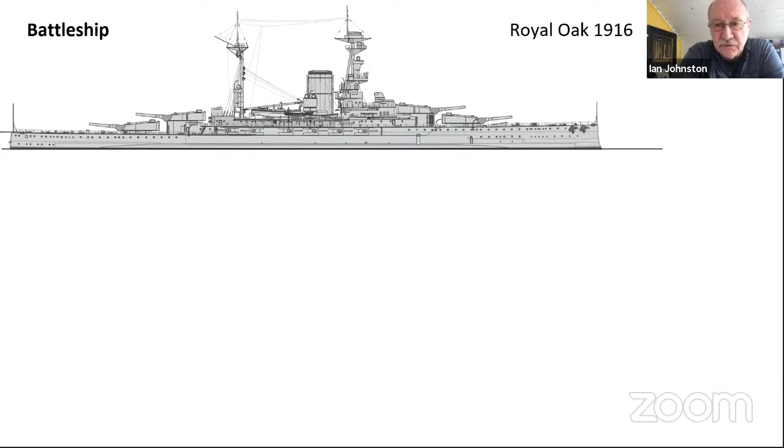If we look at the battleship - here is Royal Oak, very familiar to people from Orkney, a state-of-the-art battleship in 1916 - and compare that to a battlecruiser, you can see in scale just how much bigger the battlecruiser was. The reason for this is the whole issue of speed, and the amount of steam required to drive the turbines to make this extra speed.

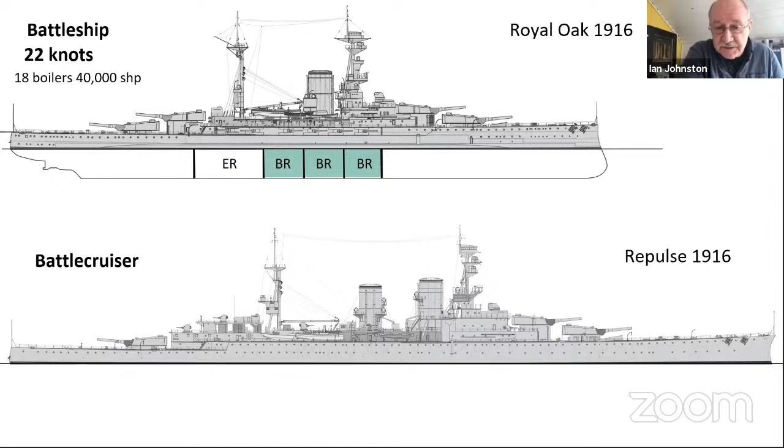If we look at the internal makeup of the Royal Oak, we can see the number of boiler rooms and the engine room, and compare that to Repulse, you can see the huge additional space required in the hull for the extra boilers and larger engines needed to drive this ship at an additional 10 knots. That explains the fundamental reason why the battlecruiser was such a larger ship, much more impressive in many ways, and very quickly warmed themselves to the hearts of the British public.

The one downside was that while the battleship was very heavily armored, the battlecruiser was lightly armored, and it was seen that speed was really part of its defense - getting out of the way quickly.

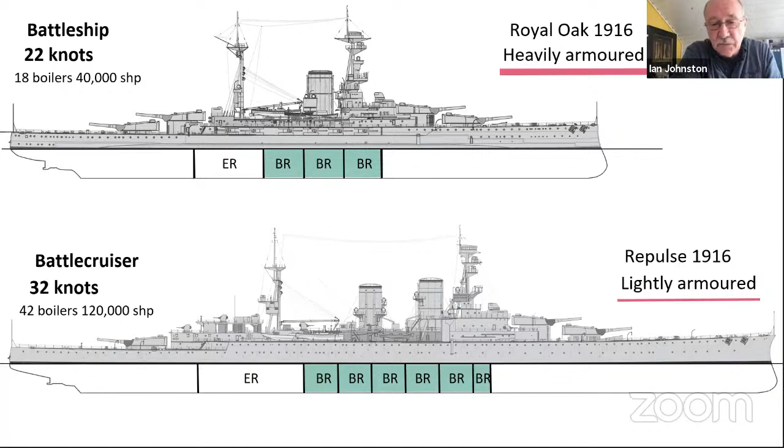Over the 10 years from the design of the first battlecruiser in 1906 to the appearance of Hood, the type evolved very quickly indeed, almost doubling in displacement tonnage, and going from a rather ungainly looking ship to the very handsome, beautiful lines of HMS Hood and Repulse.

So a little bit more now about the Anglo-German naval race, of which Hood was probably the last British warship built as part of that race. This was all because of the rise of Germany as a naval power. Germany was united as a country in 1871, but it wasn't until Kaiser Wilhelm II came to power in 1888 - he was, of course, the grandson of Queen Victoria - that things changed. He was hugely impressed by the British fleet, and decided that Germany, hitherto a large land power but not a naval power, should have a very large navy, one which could perhaps not rival the British fleet, but take it on and do it some damage.

Through Admiral von Tirpitz, head of his Admiralty, Kaiser Wilhelm formulated a series of laws which enabled the German Navy to become very much larger in size. Particularly from 1906 onwards, when the British battleship Dreadnought appeared, the Anglo-German naval race began in earnest.

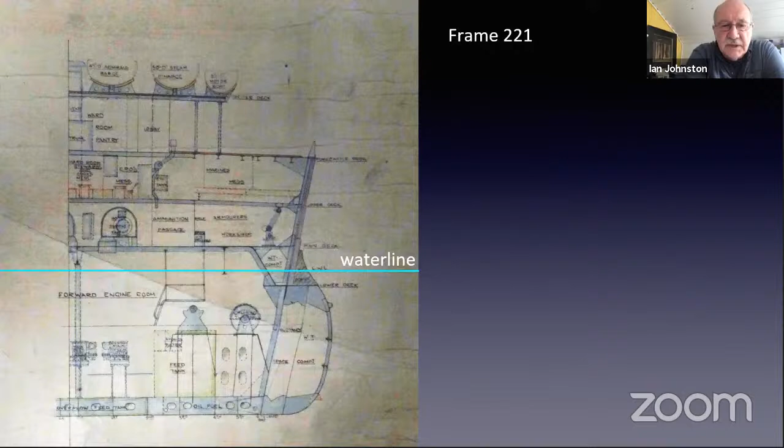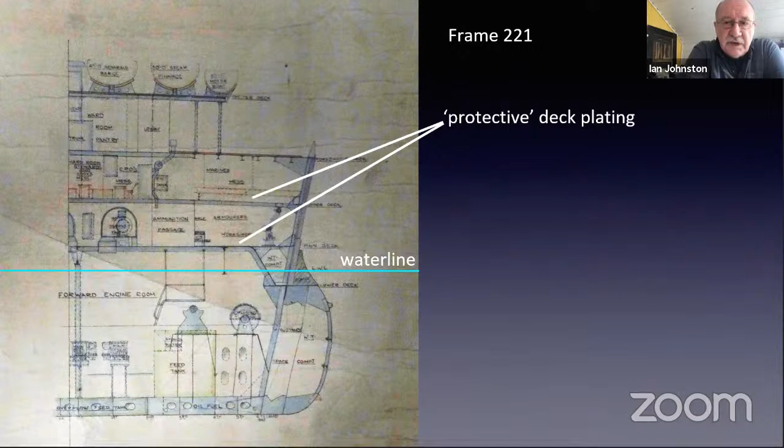So the changes that were made to HMS Hood as the keel plates lay on the slipway at Clydebank, as a consequence of Jutland, were as follows. Here is a section through the ship, through the midships section, showing where the changes would take place. HMS Hood had what was termed protective deck plating on a number of decks.

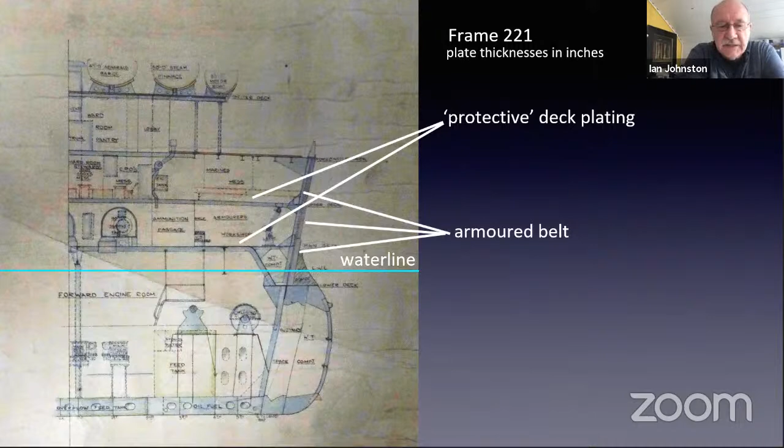She had side armor, an armor belt in 3 different tiers. And she had this rather large bulge which extended for almost all of the hull. That was there not to deflect, but to absorb the explosive force of a torpedo, should she be hit by one.

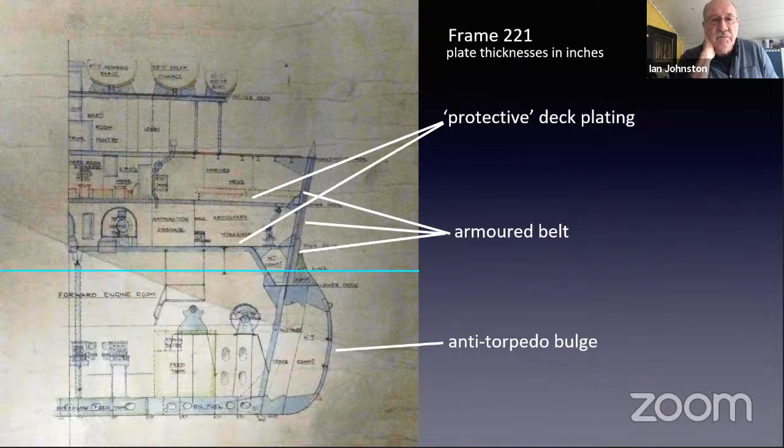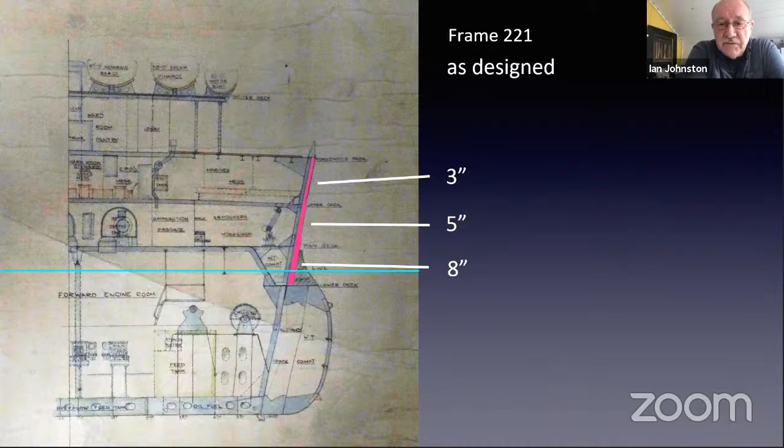Above decks, the turrets were armored, as were the barbettes which supported the turrets. So what happened as a consequence of the design changes was that the 3 tiers of armor running down the side of the ship were changed from 3, 5, and 8 inches to 5, 7, and 12.

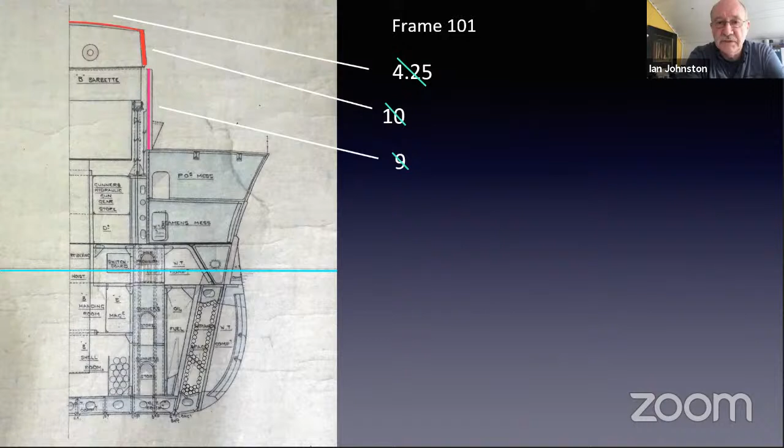The above decks armor on the barbette and on the turrets themselves was increased to 5, 12, and 12 inches, and 15 at the front of the turrets.

And she would now be 3 feet deeper in the water, which gave rise to problems right aft, as she was always a wet ship because of this. But importantly, she was now armored on the same scale as a battleship. Going back to Royal Oak, for example, she was armored on the same scale as that ship, giving rise to HMS Hood being probably what was termed the first fast battleship.

The photographs are quite exceptional, and out of the chaos of deindustrialization, when lots of photographs and records of famous companies were lost, we are very fortunate that those of John Brown and Company have survived. Currently, most of these records are held by Glasgow University and also by the National Records of Scotland in Edinburgh. So the photographs you're about to see are from that collection. They are mostly 10 by 12 and 12 by 15 glass plate negatives, and the quality is absolutely stunning, as I hope you get to see from the photographs that follow.

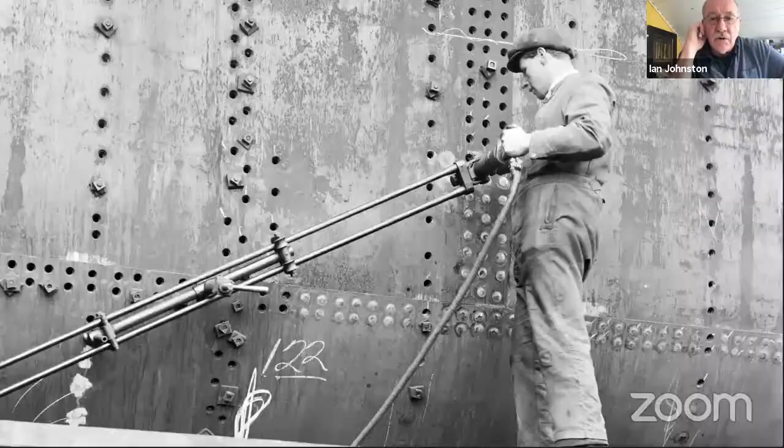Or they used a pneumatic riveting tool, such as this young man here is using at Clydebank. The pneumatic riveting tool was a very recent invention and meant that just one riveter was required to close the rivet. These riveting hand tools were very heavy, thus this structure to try and take some of the weight off, to prevent the riveter having some sort of fatigue after a short while.

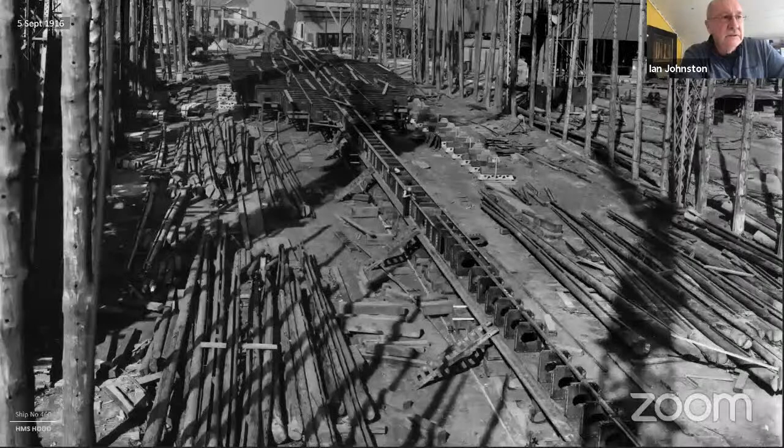This is the first ever photograph of HMS Hood, taken on the 5th of September, just 5 days after the keel was laid. There is no photograph of the keel laying, and it shows quite significant progress in the ship just in these 5 days.

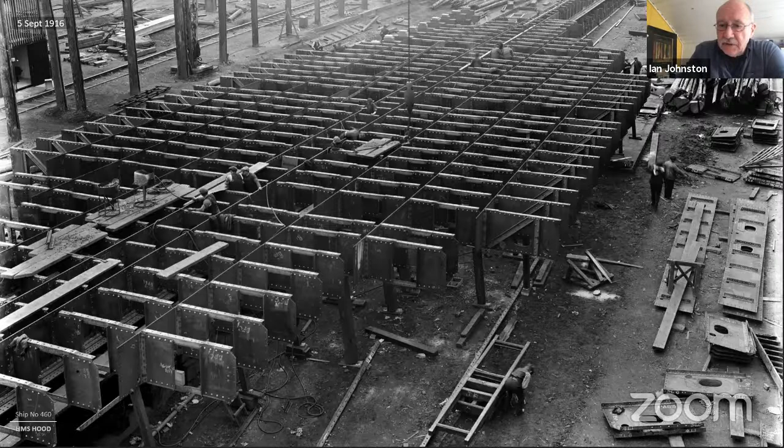This photograph, taken the same day, shows the midship section of the double bottom, and it shows how progress had been made. Partly this was because, if you look over to the right, you can see there are some sections already riveted with angle iron, which would be done in the plater's shed and then brought down. So a lot of pre-assembly had been done in the shops before it was actually laid down. The other thing to say is that this structure hasn't actually been riveted, it's been bolted together. Once it's been bolted together and faired and made true, that's when the riveters come in.

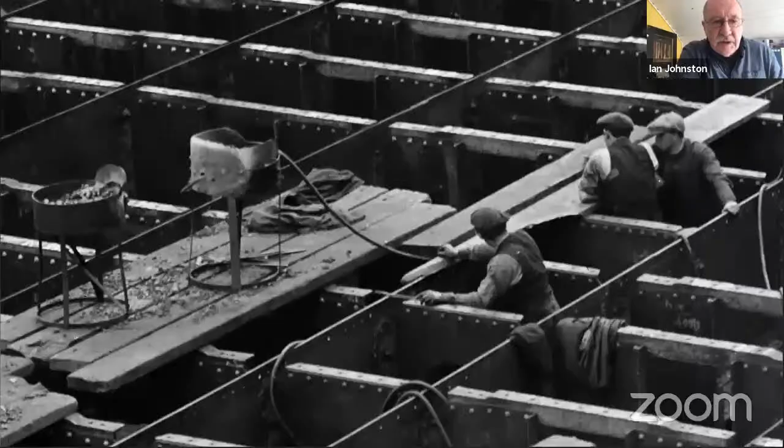This is a detail of that photograph and shows a couple of rivet fires. The rivet fires you see here on the planks were where the rivets were heated and then thrown to whichever riveter required them, and thus the riveting would begin. At this time, only 197 men were employed on Hood, just 3.7% of the workforce.

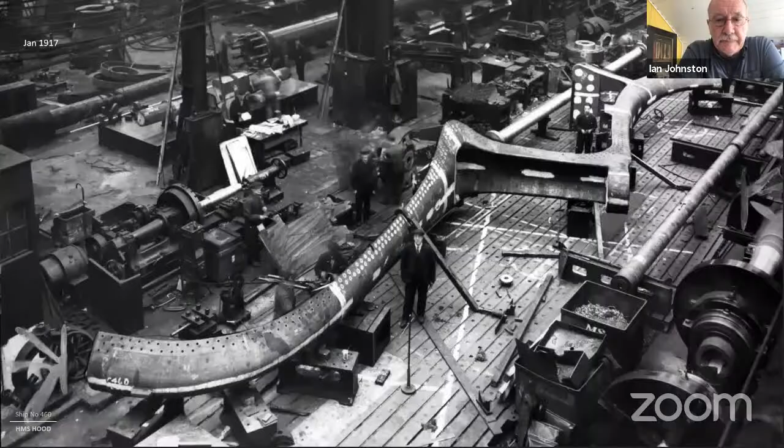While work was in progress at Clydebank, quite a lot of material had to be ordered from outside the yard. All the armor, the main armament, and the armament systems would all come from elsewhere. The main armament would come from Barrow-in-Furness, but a lot of the castings would come from William Beardmore and Company in Glasgow. This is a part of the stern frame seen here at the Parkhead Forge in Glasgow, bearing the ship's number, painted at the far end there, ship number 460.

The rivet holes have been cast into the job, as it were. And the next time we see this is down at Clydebank.

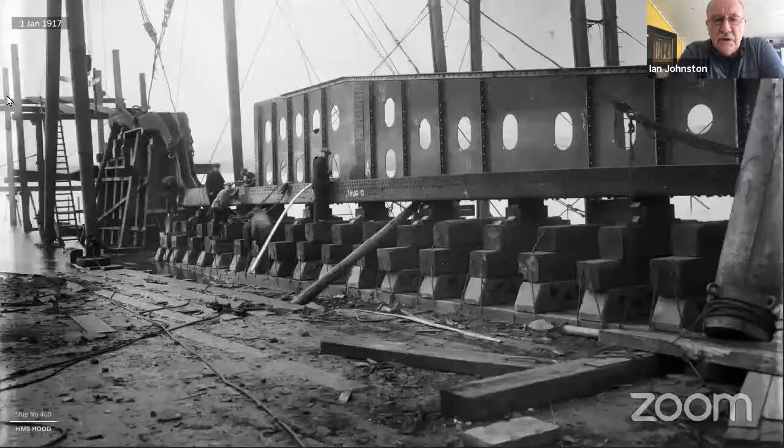This is the stern section of HMS Hood, and you can see that stern casting there, which John has just highlighted, being pulled into position with the keel and the vertical keel sections of Hood. A detail of this photograph shows work progressing, using a block and tackle and a turnbuckle to pull this casting, which probably weighed something like 25 or 30 tons, into position.

It will then be faired by the shipwrights to make sure everything is true, and once that's done, it will be riveted into the structure of the ship.

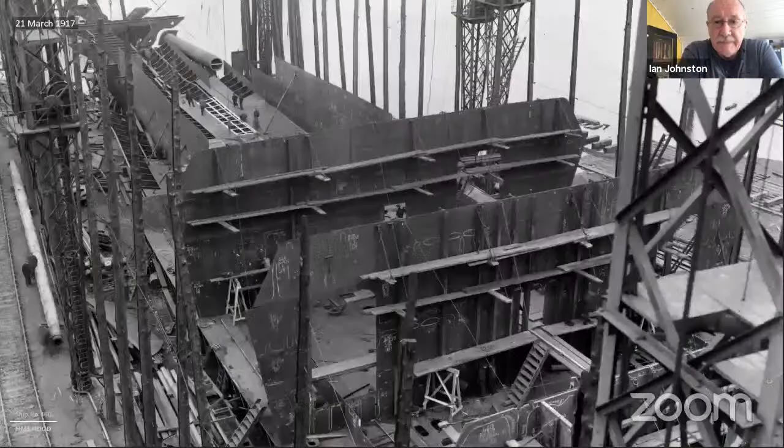This photograph from March 1917, looking right aft, shows some of the bulkheads that would separate the engine rooms. If you look at the stern tube right aft there, that's one of them. HMS Hood had 4 shafts, so this is just one shaft, the tube through which the propeller shaft will run.

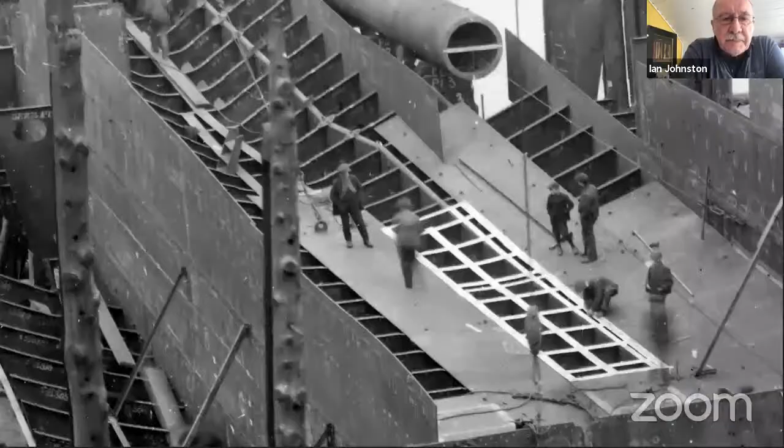Notice this white grid structure sitting there, made up of light wooden strips by loftsmen. This template will be taken back up to the plater's shed, where a plate will be made to fit that shape exactly. This is the template for making that plate, which has a compound shape, a curved plate. That's partly how complex plates were made, templates were taken for each individual one and then taken up to the shops to be made.

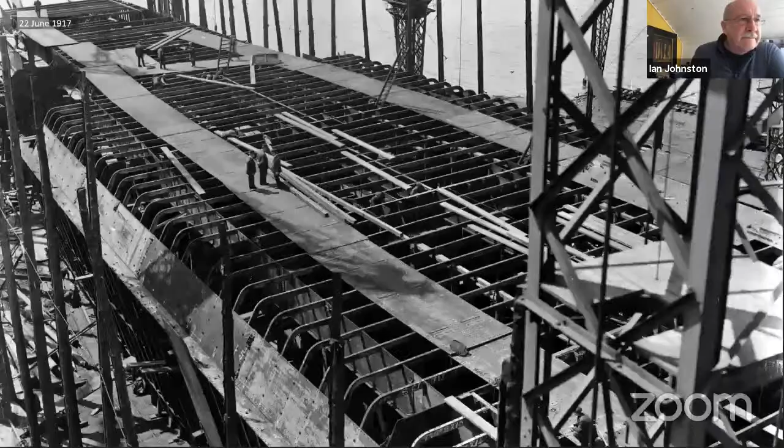This photograph shows the increasing size of the ship on the stocks, and you get some sense of just how big this ship is going to be. We're at main deck level here. The 3 gentlemen are standing on the main deck, so there's still a significant number of decks to come above that. We're probably only about halfway up the hull.

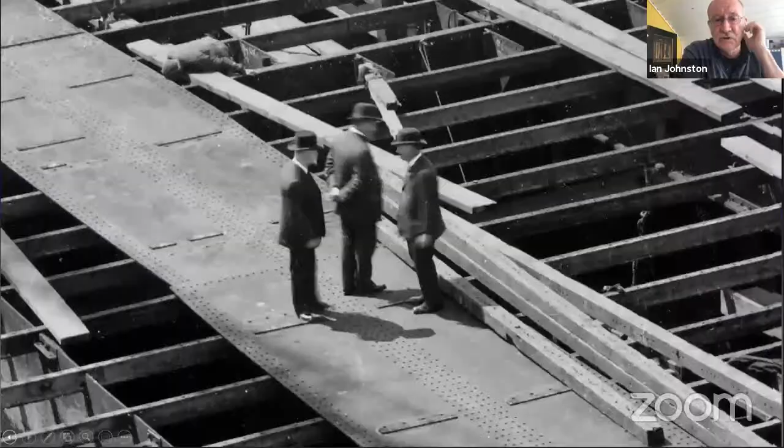In the next image, a detail of these men, headgear was a very important way of deciding who was who in shipyards. The cloth bonnet, of course, was the workman. Then you had the trilbies, the Homburgs, the top hats, and so on, identifying different people. These men are quite clearly managers of some sort, probably the shipyard manager, maybe some other directors, and they made regular trips onto the ship to see what progress was being made and to report back to the Admiralty.

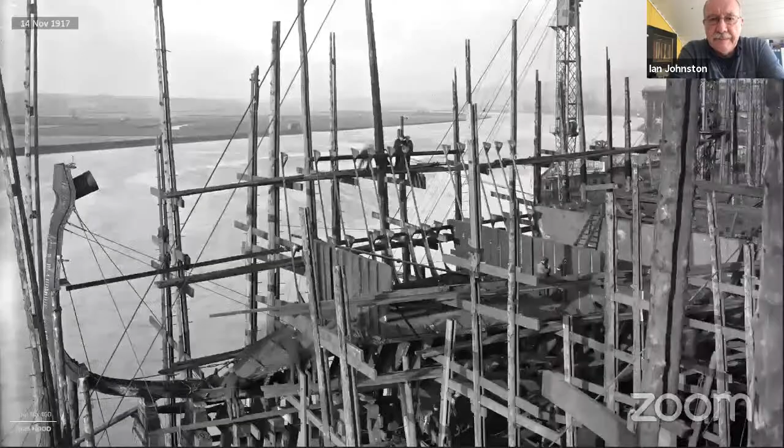This again shows the stern frame in situ, but it also shows the huge amount of timber used in shipbuilding in those days in the form of staging and props and so on.

Looking at the men standing up there, we see just how precarious work on this ship was, and indeed in all ships and shipbuilding at this time. Very little attention was paid to safety. These men do have a plank to hold on to, but they're only standing on a very narrow ledge. You can also see two other figures here who are very blurry, because all these photographs are time exposures.

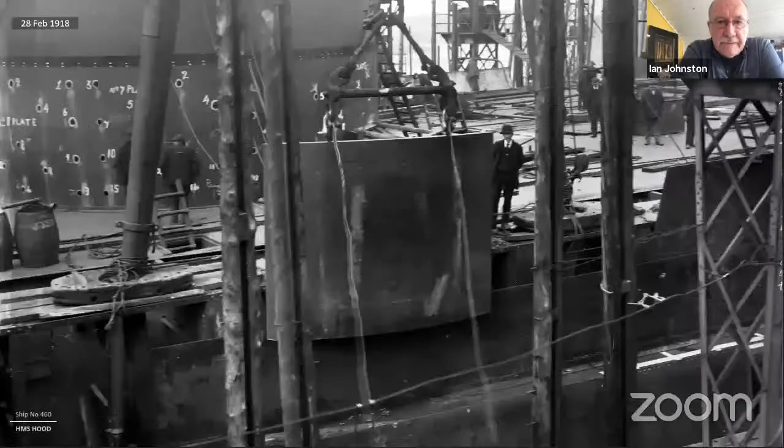This photograph shows a heavy armored plate being lifted by a series of A-frames or sheer legs, which have been stepped onto the deck of the ship to hoist this very heavy plate up, perhaps weighing between 30 and 40 tons. It's going to be fitted to the structure behind it, which you can see with all the holes and the numbers. Armor was bolted to the substructure of the ship, and these holes, which you can see top left there, are the holes through which the bolts will pass to secure the armor to the structure of the ship.

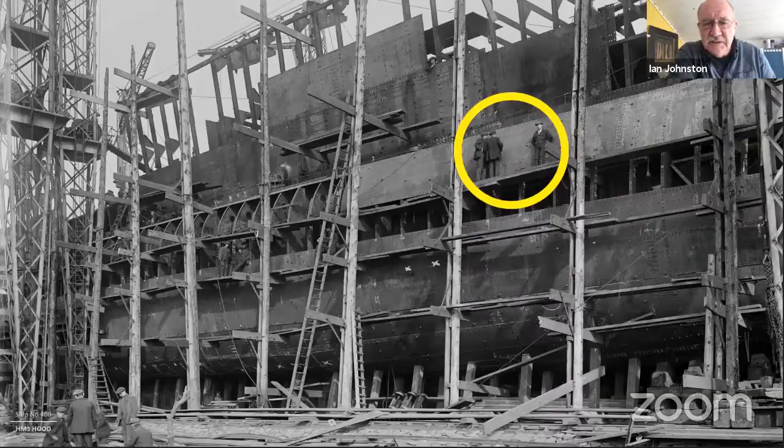A view of the side of the ship, the port side of the ship, showing the bulge, which I identified earlier, being constructed. In the next slide, the three workers standing on this very narrow ledge point to the very precarious nature of shipbuilding. What you can't hear here, of course, is the sheer noise that would be in the shipyard at this time, with innumerable riveting guns going and hammering and so on. So you don't get the sense of the atmosphere of it, but you do see the precarious nature of working on ships like this. These men are probably standing 30 feet up off the ground at this point.

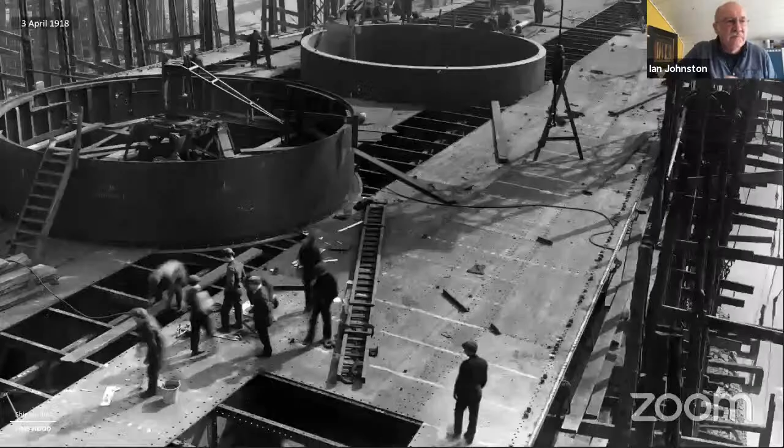This image is looking at the after end of the ship, and here are the barbettes. The barbettes are the circular, heavily armored structures upon which the turrets will sit. The one right aft has already had its armor fitted, which is 12 inches thick, whereas the one nearest the camera is still waiting to have its armor fitted.

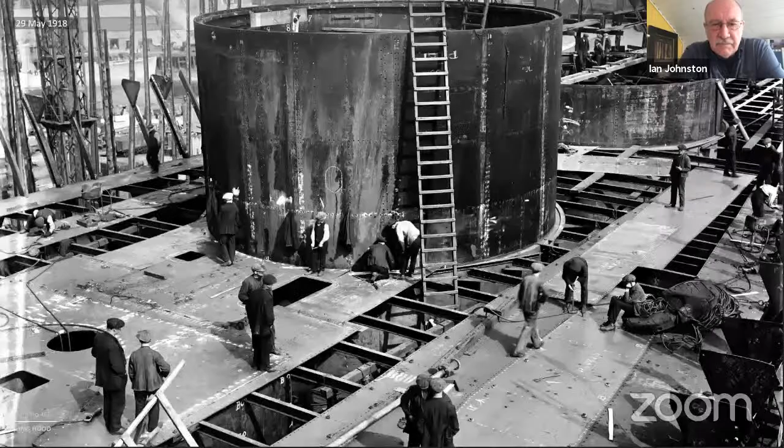Just a close-up of B barbette and work in progress there, giving some idea of the general conditions men were working in. Over to the left-hand side you can see the frames with knee joints at the top of them - that is the weather deck, which will be the final height of the decks on the hull of the ship.

Center bottom of shot, these two gentlemen - I had an uncle who was a plater, and I would show him photographs like this and ask, what in heck's name are these two men doing? He would say they're simply trying to make themselves heard because it's just so damn noisy.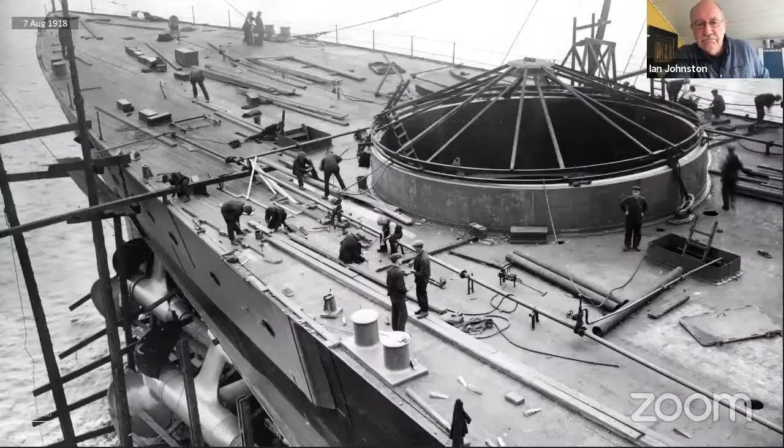Looking right aft, she's still on the stocks here. The shafts are in position, the propellers have been fitted, and the deck is being planked - this is the quarter deck. The decks were all the finest teak, typically 2.5 to 3 inches thick, and these craftsmen are making the most wonderful job of fitting them together. You can recognize some of the tools - brace and bit, various hammers and planes. The elevated pipes running across carry compressed air for power tools.

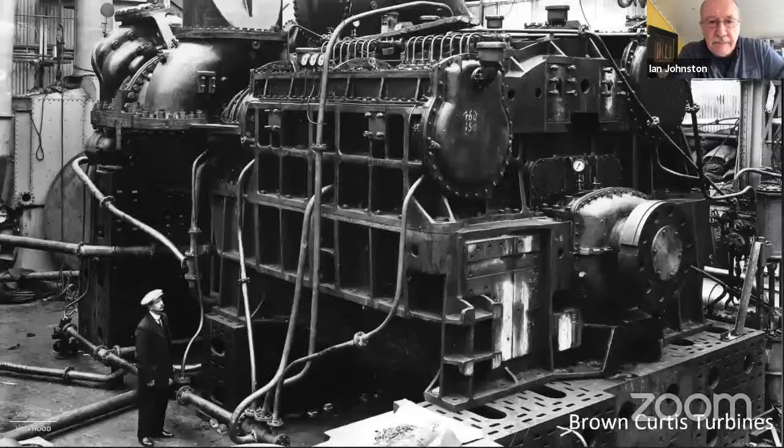The machinery which will drive the ship - a series of turbines inside this major structure, a Brown Curtis turbine. Curtis turbines were American designs, but the John Brown Company modified them to make them suitable for Royal Navy purposes, hence Brown Curtis turbines, though essentially of American design. There would be 4 of these, one for each shaft. This one has been completely assembled, wired and plumbed so they could run it gently in the shops to iron out issues before it goes on the ship. It will then be broken down into component parts, taken to the quayside, and lowered into the ship. Craneage at Clydebank didn't go any greater than 150 tons, so while they could lift 150 tons, they couldn't lift the 300, 400, or 500 tons which this would weigh.

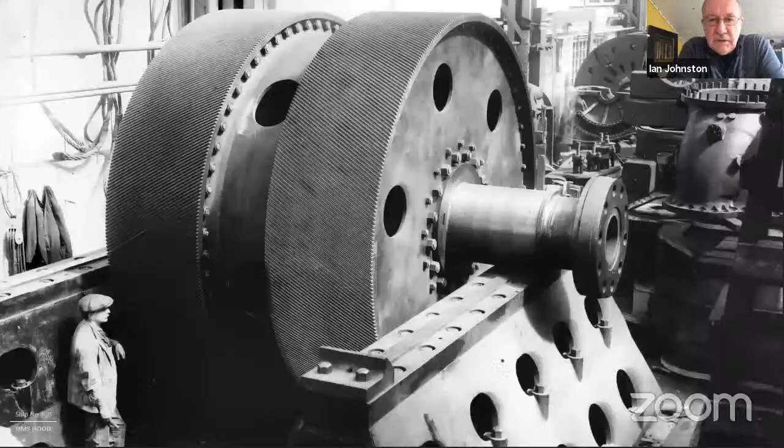This photograph shows a helical gear wheel. Once again there would be 4 of these, one for each shaft, on a trestle here being balanced to make sure it's perfectly in balance, so when it goes into the ship it will run perfectly. This is a casting which has been machined, and it would weigh something in the region of maybe 40 tons.

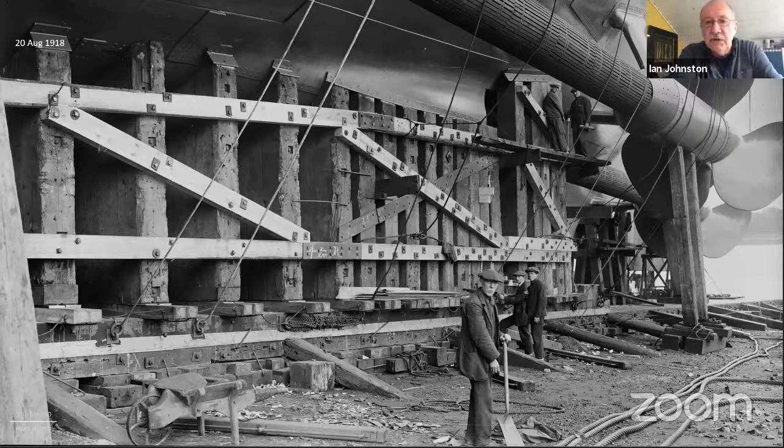This is another view right aft, a further detail showing this poppet construction. Various metal bits of bracket have been riveted to the side of the ship, which will subsequently be removed, but they're there with this wooden structure, which will slide with the ship down into the river as it's being launched. Because these are time exposures, I think the cameraman has asked these men to stand still for a couple of seconds while he makes the exposure. I don't think they're necessarily gobsmacked by seeing a photographer, even though the cameras were gigantic in those days.

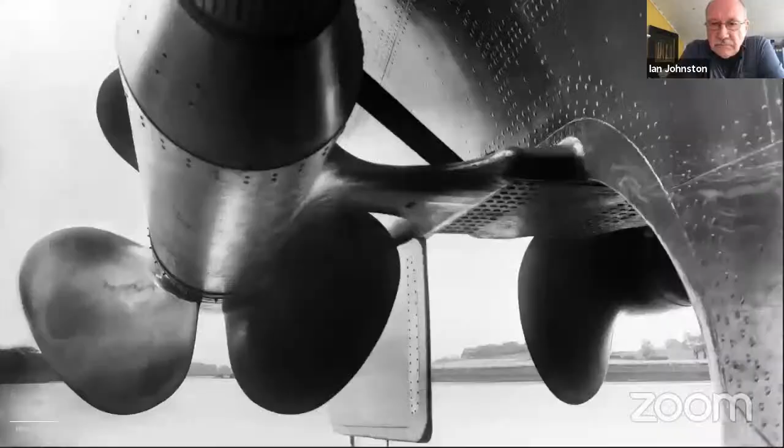This is an interesting photograph looking right aft underneath the propellers and the shafts. You can see this massive structure, this palm structure, which links the shaft to the hull, and the huge number of rivets required to fasten that and make sure it's very rigid. You can also see the ship's rudder right aft there. Also notice the rural setting of John Brown Shipyard, one of the most heavily industrialized parts of the river on one side. On the other side, it was all green fields and cows, really quite idyllic and quite a contrast.

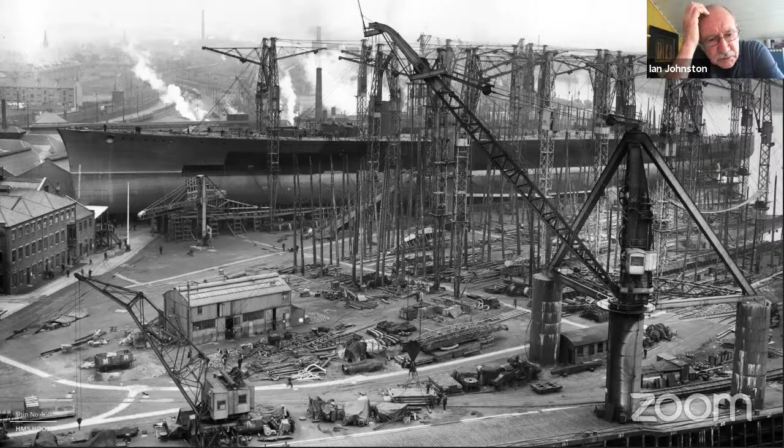Again, a well-known but remarkable photograph of the ship, almost 900 feet long, lying on the ground at John Brown's shipyard, just waiting. You can see the launching platform has been built right at the bow, the white bit of the roof of that structure — that's where Lady Hood will stand to launch the ship. The shipyard is being tidied up and made good for the launch.

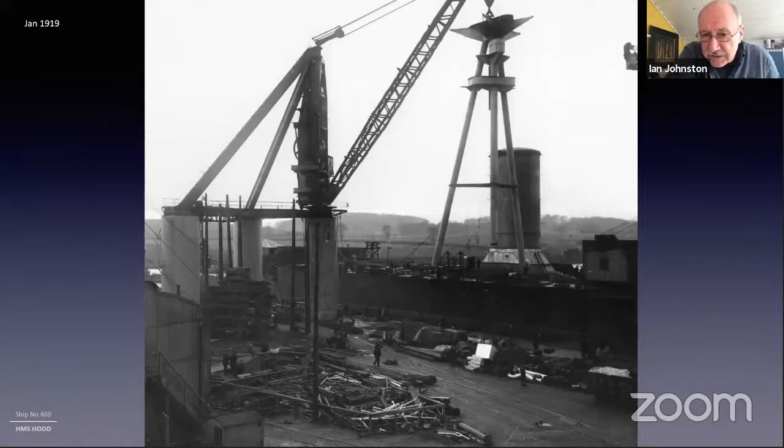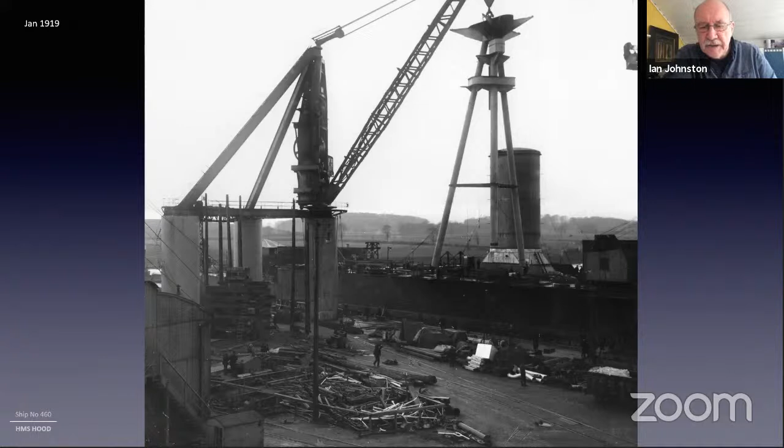This photograph shows the foremast, the pre-assembled foremast being lifted on board by the derrick crane, and the after of the 2 funnels is already in position. There's a whole massive amount of material lying at the quayside waiting to go on board.